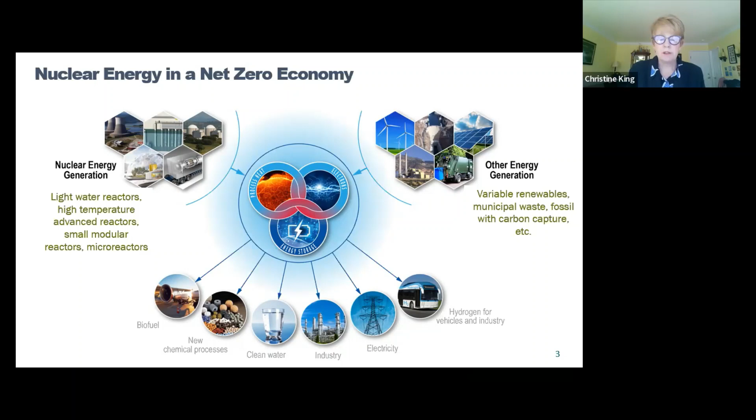Next slide. So what does the build-out potentially look like? To achieve these goals, you might ask why they can't be met with wind and solar alone. As penetration of renewables grows, issues with power generation variability, interconnection congestion, and transmission constraints increasingly necessitate the need for firm, reliable, zero carbon power generation sources. This is where nuclear is uniquely positioned to fill that gap.

Most energy growth studies conclude that approximately 200 gigawatts needs to be added by 2050. So what does that scale up look like? If 2 gigawatts per year of industrial capacity can be added starting in the 2029 timeframe, ramping up to 13 gigawatts per year from 2035 to 2050, that's what the ramp looks like.

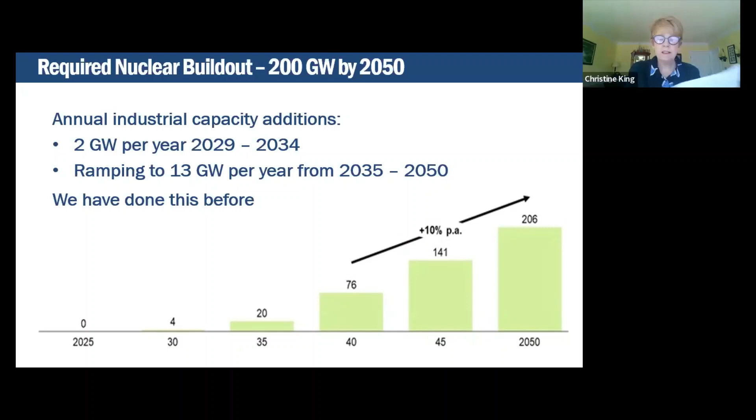This does sound hard, but it is something we have done in the past. Throughout the 70s and 80s, the US averaged 5 gigawatts per year of new nuclear capacity, with some years approaching 10 gigawatts. This is achievable. Next slide, please.

To deliver 200 gigawatts of new nuclear by 2050, we will also require a workforce pipeline that can ramp up to 50,000 by 2030 and up to 300,000 by 2050. These jobs are not just engineering jobs. They include welders, electricians, pipe fitters, and other trades. The workforce expansion would build from existing cohorts of experienced labor while taking advantage of the fossil energy transition. This is where energy justice really does come into play as we look at the clean energy transition.

So if we take a moment to talk about the completion of Vogtle units 3 and 4 in Georgia. There's been a lot of criticism and concern regarding the project's cost and schedule overruns. However, it could also be said that the high upfront costs of this first of a kind nuclear project are a down payment on catalyzing our US nuclear sector.

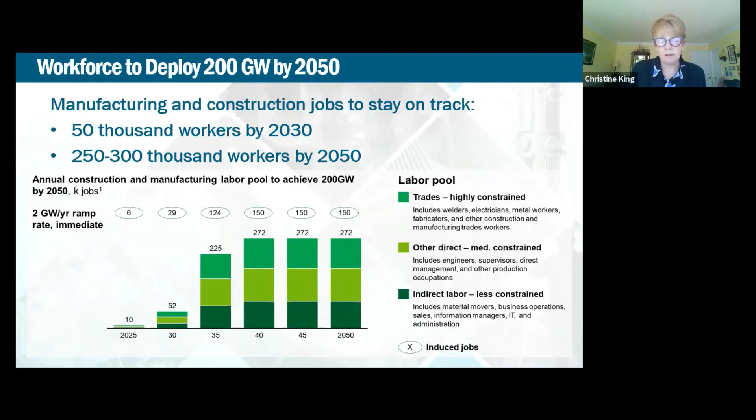Much broader than the success of one plant, investing in Vogtle has laid the foundation to jumpstart the advanced nuclear industry, establishing supply chains and training a new generation of workers with the skills necessary to build future nuclear plants. These supply chain and workforce investments will enable not only the domestic production of nuclear power, but also support us taking the lead across the globe and exporting US nuclear technology. Next slide.

To talk about the help from the federal level to support this kind of transition, there are 2 recently passed laws I'm sure you've heard about. They're quite large, but let's talk specifically about what is in these laws to support nuclear power. The bipartisan infrastructure law, signed November 15th, 2021, included $62 billion for the DOE to help transition the US to a clean energy economy, leveraging the largest single source of clean power, nuclear energy.

The bipartisan infrastructure law also included $6 billion to start the Civil Nuclear Credit Program. This is for our existing US reactors that can apply for certification or competitively bid on credits. It's where owners and operators of commercial reactors can apply for certification to get credits for continued operations and avoid premature retirements.

The DOE has its first applications in-house and is evaluating them right now for the first credits to be issued. There was also $8 billion dedicated to demonstrating regional clean hydrogen hubs. At least one hub will be dedicated to the production of hydrogen with nuclear energy. And finally, the bipartisan infrastructure law provided almost $2.5 billion to support the 2 advanced demonstration projects, which I'll talk about in a few minutes.

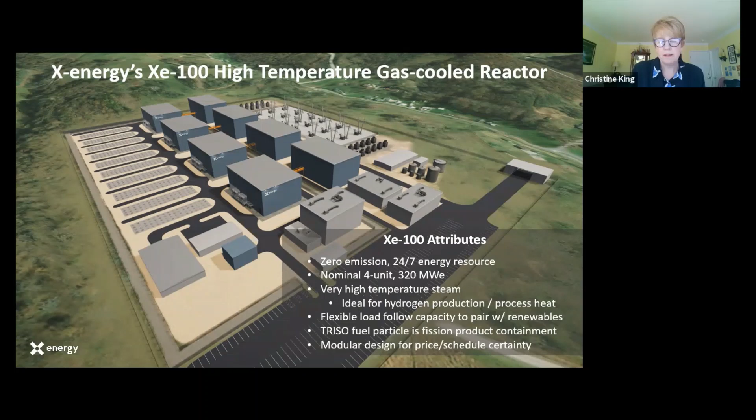Often the first question we get, whether nuclear energy is a responsible solution, is what about the spent fuel? So let's put this in context. The amount of space spent fuel requires is not large. The total spent fuel produced by all US nuclear power plants to date roughly totals the same volume of waste produced by coal every hour. All commercial waste since the 1950s would only cover a football field to the height of 10 yards.

However, we do know that permanent geological repositories have proven politically controversial. To manage the nuclear waste challenge, the Blue Ribbon Commission on America's Nuclear Future made several recommendations, including a consent-based approach to siting future nuclear waste management facilities and prompt efforts to develop one or more consolidated storage facilities. And that is why the DOE is developing an integrated waste disposal strategy with a focus on consent-based siting processes for siting federal facilities for the temporary consolidated storage of spent fuel.

The first step in moving towards permanent disposal is to develop the framework for consent-based siting for this temporary consolidated storage. The DOE launched a funding opportunity announcement for community engagement on consent-based siting. The DOE is not currently soliciting volunteer sites to host consolidated interim storage as part of this funding opportunity, but they're hoping to encourage engagement and open dialogue and build capacity among interested stakeholders about the consent-based siting process. In recent years, consent-based siting has been successful in Sweden and Finland.

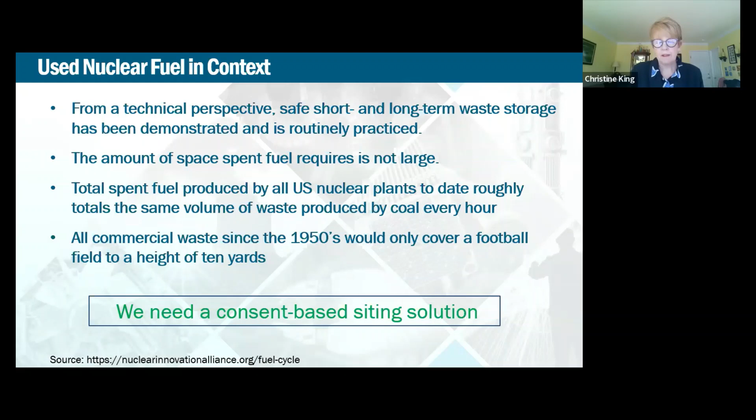So what are we doing in the meantime? Utilities are using dry storage to manage their spent fuel on site. Fuel that's removed from the reactor is stored in pools of water for cooling. After a few years in the pool, the fuel has cooled and the radioactivity decreased enough to allow it to be removed. Moving spent fuel into dry casks frees up space in the pool to store spent fuel newly removed from the reactor. Dry casks, you can see here, have a sealed metal cylinder to contain the spent fuel assemblies, and each canister is designed to hold anywhere from 2 to 6 dozen spent fuel assemblies.

Water and air are removed and the canister is sealed with inert gas. It's either welded or bolted shut. In some designs, the casks are set vertically on a concrete pad, as you see here, or below grade. In other situations, they're placed horizontally.

Dry cask storage is safe for people and the environment. They're designed to contain radiation, manage the heat, and prevent nuclear fission. They must resist earthquakes, projectiles, tornadoes, floods, temperature extremes, and other scenarios. The heat generated by a loaded spent fuel cask is typically less than is given off by a home heating system. The heat and radioactivity decrease over time without the need for fans or pumps, and the casks are under constant monitoring and surveillance. You see here an installation on the right-hand side to give you an idea of how big they are relative to a human being.

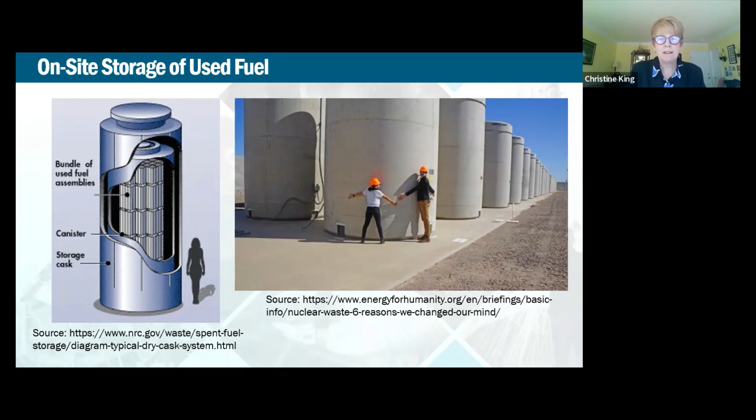I think that's the end. And that is the end of me channeling Alice.

That picture at the end, I wasn't sure if it was showing the size or if people were actually hugging the containers. It's also to show that you can hug a container if you want to. I realize maybe in this audience we have more people that hug trees.

That's good. I think that was a great job channeling Alice and giving us the top-down perspective from the DOE. I think it's clear that from the U.S. energy point of view, there's a clear role going forward as part of the planning, and there's a lot of time and effort being spent in pilots and moving this forward. I think one of the next questions is how do we move from this national picture to what's going on at the state level? You mentioned consent-based permitting. In the end, a lot of this comes down to states allowing this as well. When we get to the questions, maybe we could talk later about why it's taken so long to get some projects permitted, why Vogtle has taken so long.

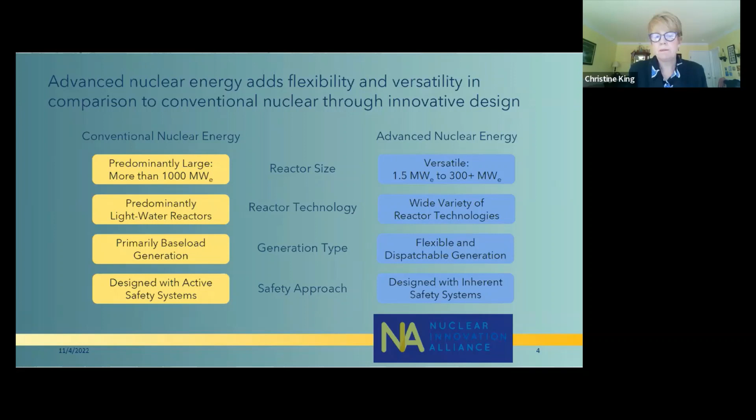Next slide, please. So there's different types of fission. On the left-hand side here, you see thermal, or the molten salt reactor, which has the ability to either operate in that thermal or fast fission capability.

I talked earlier about NuScale as an advanced light water reactor option. X Energy is doing a high temperature reactor. And Kairos is going to talk about actually a hybrid between some of these technologies in terms of the molten salt variety. On the right-hand side, you see fast fission: a gas-cooled reactor, a sodium-cooled fast reactor, which is the Natrium project I spoke of earlier, and some folks are also looking at lead-cooled fast reactors. All of these have different advantages, different operating profiles, different fuel cycles, so it gives end users the ability to choose the product that makes the most sense for their needs.

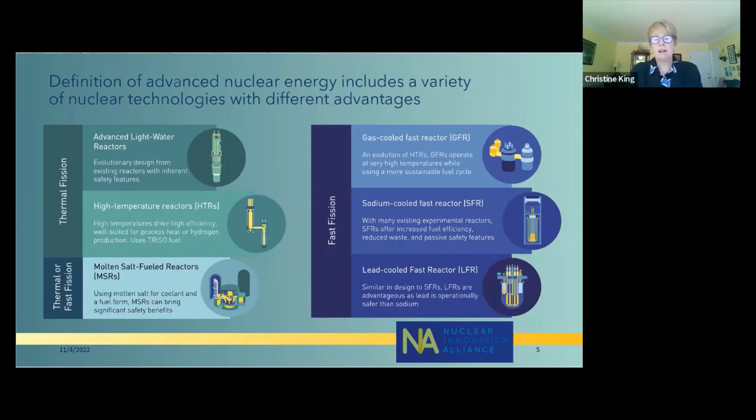And speaking of those needs, I'm going to come back to the slide. Next slide, please. I'm going to come back to this slide to talk a little about as we move forward. I think it's very important for all of us who have been in the energy business.

So that does mean we're talking about not only the electricity, and electricity demand is going to grow as we decarbonize across many different sectors. We have to find clean process heat. And as energy storage comes on as well, that's going to be another shock absorber in our system that allows us to make the best use of all the clean energy sources available to us in the future.

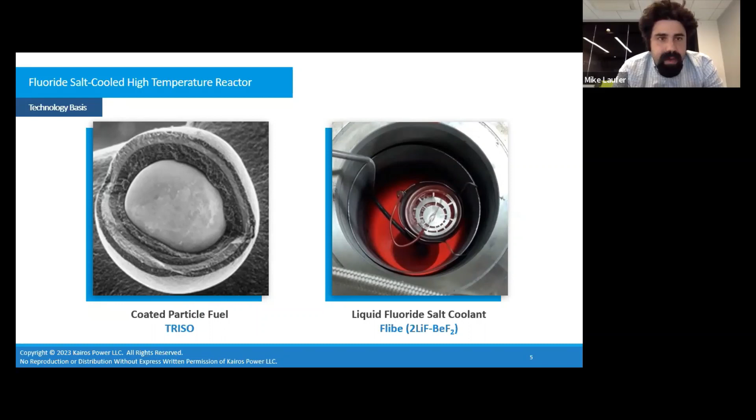So this is key: safety and cost are very closely linked for us. It's a major driver of why we've been engaging with the Nuclear Regulatory Commission for a number of years, and I'll talk a little bit about our progress there. But safety and cost are really intimately linked for our system, and they're both really important.

When we look at the commercial landscape, the biggest barrier for new nuclear in the commercial world is cost, but it's not just cost—it's also cost certainty.

This is kind of a quick summary about what Kairos is doing. If nuclear is going to play a significant role in our efforts to decarbonize, it's my core belief that the availability of safe and affordable nuclear makes that vastly easier to tackle. This is what it's going to take to get there. Kairos is active in all these areas: we have design programs, engineering, testing programs and development, licensing efforts, and fuel chain work—I talked about our in-house manufacturing. We also have early iterations for developing both the ability to produce the fuel and the salt, which are key aspects of our technology.

The combination of all of this produces a set of certainties: technology certainty, licensing certainty, supply chain certainty, and build certainty. The product of each of these is true cost certainty—how much it's going to cost to deploy the technology and how much it's going to cost to operate it. It's also going to provide data on how much it's going to cost to decommission and be responsible at end of life, as well as how to manage the spent fuel. All of that is embedded here, and I'll talk in two slides about some of our strategies to get there.

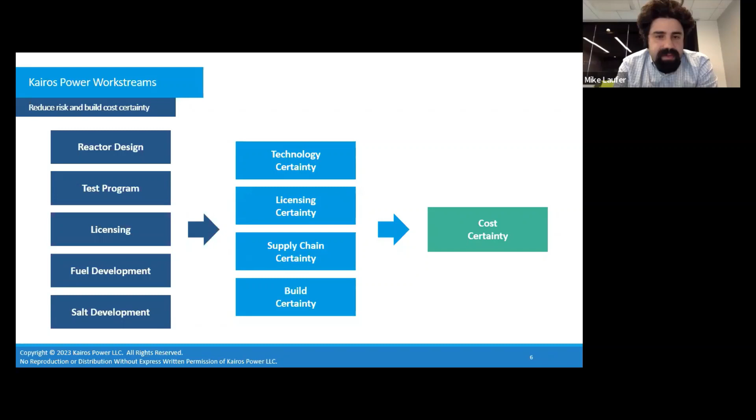it's going to require new infrastructure. So our headquarters, we're here in Alameda. That's where I am today. We have several lab facilities here. We're working on all non-nuclear kind of rapid iteration testing at smaller scale in this facility.

We have a development facility in Albuquerque, New Mexico. We're doing larger scale non-nuclear tests in that facility, as well as standing up a substantial amount of our production infrastructure. We have a number of smaller facilities and partnerships, but the other important site to point out here is the site in Oak Ridge, Tennessee, which is the site where the Hermes reactor will be. This is going to be a low power demonstration reactor that we're working to build, and I'll talk a bit about the progress for that facility.

I'll make a note here about, I think it connects to the mission, but I know that environmental justice is an increasingly important issue in the energy landscape, and it connects into the need for clean energy and doing so in a responsible way. I would say the tenets of environmental justice are really deeply embedded in Kairos, not just in words, but also in action. The components about improving quality of life, protecting the environment, really instills a sense of responsibility that's embedded in the mission.

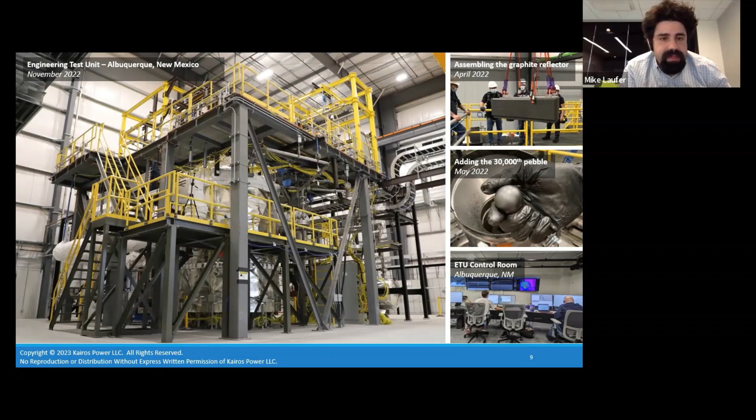On the right side, we've gained practical experience assembling. We have graphite blocks - we've manufactured many of those, and we'll be manufacturing all of them in our systems. The pebbles in the system we've set up manufacturing for, and then operations. We're expecting to load salt into the system later this spring.

We're on track for operations in 2026, and a few major accomplishments: we were selected in late 2020 for a substantial DOE award, about $300 million, to support the project in cost share. Kairos is covering more than 50% of this project cost, so I'd say this is primarily a privately funded effort, but with some federal support. The order there is hundreds of millions in terms of the project, compared to the billions of the demonstration program. So we're a smaller scale project.

We kind of acquired and did due diligence on the site in pretty short order. We acquired the site in summer of 2021, and submitted the construction permit for the reactor to the Nuclear Regulatory Commission in November 2021. That review has gone very, very well - it's been a really productive back and forth with the NRC. Essentially, the technical review of the application is complete. They issued the draft environmental impact statement and ran a public meeting in Oak Ridge this past fall. If everything stays on track, we should be getting the construction permit hopefully late this year, if not early next year.